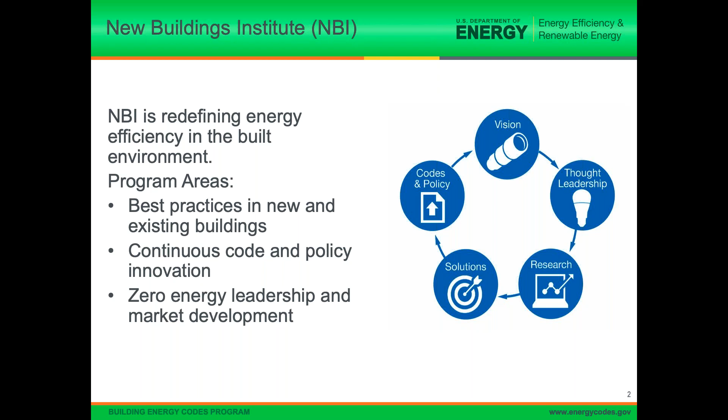NBI is a nonprofit working to improve the energy efficiency of buildings. We have a couple of areas that we focus in to pursue this end: best practices in new and existing buildings, so this would be guides that we put out into the market, continuous code and policy innovation, and zero energy leadership and market development.

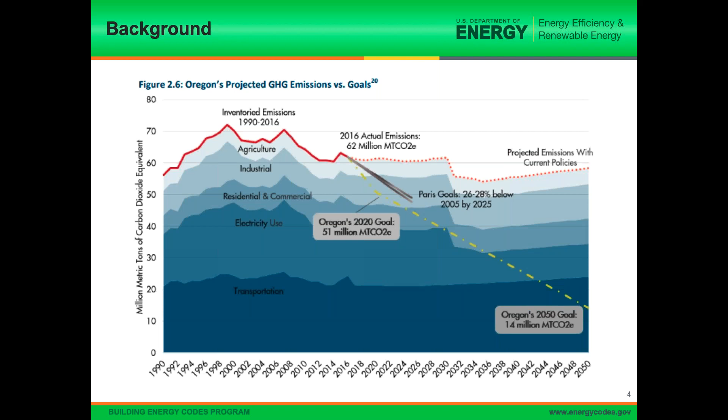I think it's useful to do a little bit of background information on why Oregon is making this change to its energy code. Through both legislation and executive orders, Oregon has some pretty aggressive goals for reducing greenhouse gas emissions and energy consumption in the state of Oregon. And of course, buildings are a big part of that. And so that means trying to bring down the energy and carbon consumption that we see in buildings, and the energy code is one of the prime policy tools to do that.

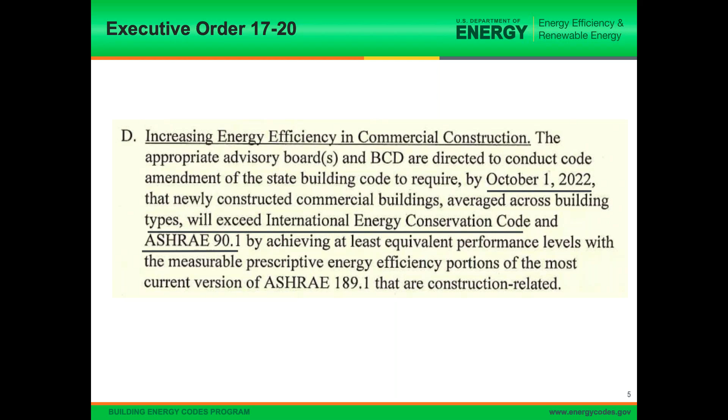Specifically, some of you may have heard of Executive Order 17-20, because it was a pretty big and sweeping statement on what the governor hopes to accomplish in the state of Oregon. And it specifically has direction for the commercial energy code to achieve the levels of efficiency that we see out of national standard codes by October 2022 or even better. And this is part of the reason that Oregon needed to make a shift from its previous code, which was a little bit of a combination of home-brewed requirements developed in Oregon itself and the IECC.

The state made the choice to go across to ASHRAE Standard 90.1 instead of the code that it had before for a series of reasons, including the national vetting process and then the many tools that are available for use and the savings analysis that has already been done, to streamline the code adoption process in Oregon so that we don't have the same kind of long delays in between energy code updates.

And in order to go beyond what the model code's done, Oregon has adopted a zero-ready code. And this is based on the Zero Code produced by Architecture 2030, which is a combination of using ASHRAE Standard 90.1 as a basis for performance and then pairing that with on-site and other renewable energy to bring the building performance to zero net energy.

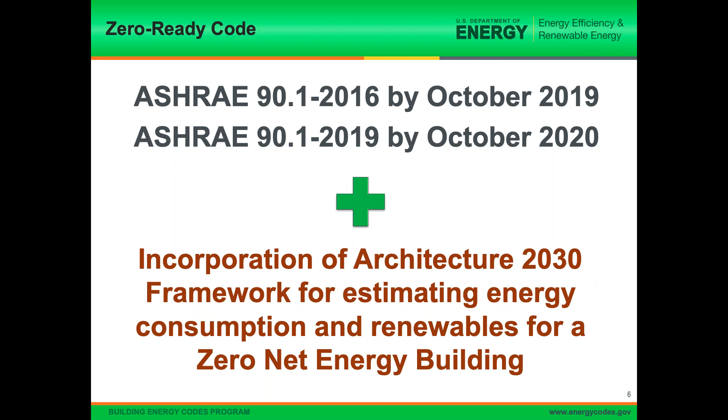Now, the reason that this is a zero ready code and not an actual zero energy code is that unlike the zero code that Architecture 2030 has put together, in Oregon, you won't have to install the renewable energy system. You will only need to calculate the size of renewable energy system that would be required to make your building zero net energy. So performance levels are determined by ASHRAE standard 90.1, and then you do this additional calculation that will let you know how much renewable energy you would have needed to make your building zero net energy.

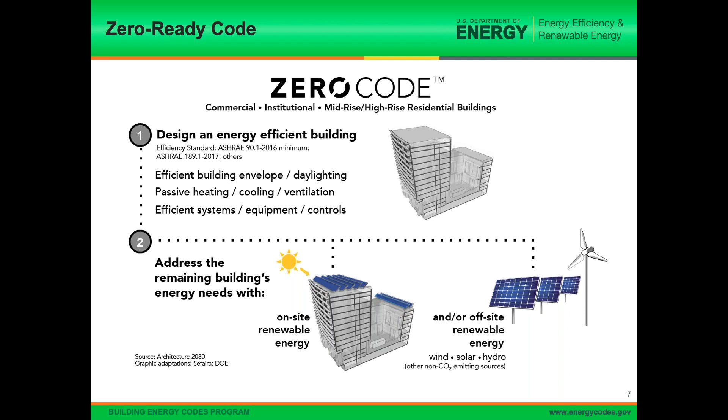This will be useful for designers who are going through the process to see really what is the gap between their building performance and the amount of renewable energy production that they could conceivably build on site, and begin to adjust their design practices to get closer and closer to zero net energy. Now, to assist in this, Architecture 2030 has actually put out some tools for calculating the size of the renewable energy system that you might need.

You can enter in some simple information about your building, like its location, number of stories, how it's used, and then some information about typical renewable energy system that you might install on your building. And with this really pretty simple information, in most cases for the renewable energy system you'd be using best practices and what's available on the market. You can calculate the size of the on-site system that you would need to achieve zero energy in your building.

It was also recently announced that Oregon has adopted as a statewide alternative method the 2018 edition of the International Energy Conservation Code. So this is to help make this transition into the new codes. It gives greater flexibility. You can still use a code that's based on the I codes, and IECC 2018, while not quite as stringent as ASHRAE 90.1 2016 on average, in some cases is actually more stringent. In some cases, it's less. This will provide an option for you to go through for compliance.

The structure of 90.1 is, while it's divided into chapters and the numbering is very different than what we've had in Oregon in the past, the order of things and the way things are grouped is still fairly similar. You see that we go through purpose, scope, and definitions in the first 3 chapters. Chapter 4 has administration and enforcement. You might be used to seeing that a little bit earlier. Then we go into building envelope. Then we have a chapter for heating, ventilating, and air conditioning, chapter for service water heating, a dedicated chapter for power. It's short, but it is a standalone chapter. A chapter for lighting, a chapter for other equipment.

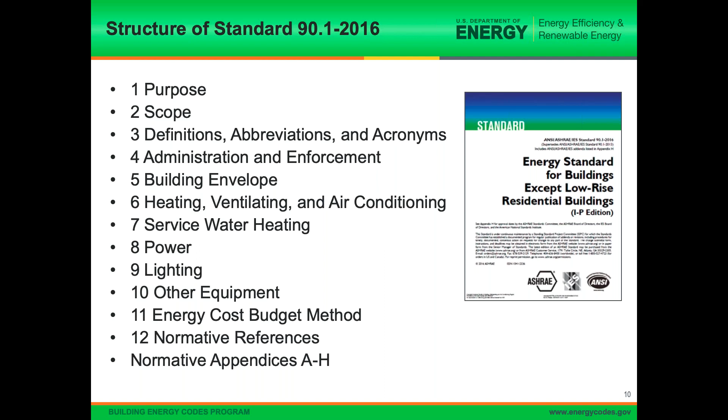And then we have chapter 11, which is using modeled simulation, it's computer modeling for compliance. We have chapter 12, which is the normative references, and then a series of appendices. And you might be very familiar with Appendix A. It's the one that gives you the U factor values for various wall and envelope assemblies so that you can look up your assembly, see what the resulting U factor of that assembly is. Whether or not you're using ASHRAE, a lot of people will use this when they're designing their envelopes. And then Appendix G, which is another modeling methodology that's available within 90.1, a rating model methodology that allows you to see how much you might actually be exceeding the code.

The way that 90.1 applies is really how we've seen before. There's not a lot of changes here. It applies to new buildings. It applies to additions pretty much as if they were new buildings, with some exceptions when you're extending systems from the main building into the addition. Alterations, it applies to the scope of the alteration with certain exceptions for certain activities. It applies to new equipment that's going into a building, and then it has criteria for determining compliance with requirements.

Unlike the IECC, it does not apply to single-family homes or low-rise multifamily. There is not another section of 90.1 that applies to these types. ASHRAE does have a standard, 90.2, that applies to low-rise residential, including single-family, but that has not been adopted in Oregon at this time. And then 90.1 doesn't apply to buildings that don't use any electricity or fossil fuels. So if you're not importing energy to the site in these forms, then it makes sense that you wouldn't apply an energy code to it.

There are, as always, certain buildings and elements that may be exempt from the code, either fully or partially. So make sure that you're checking as you are taking on a project, especially if you are less familiar with 90.1. And the caveat of all energy codes is that it's never going to circumvent any safety, health, or environmental requirements that are elsewhere in the code.

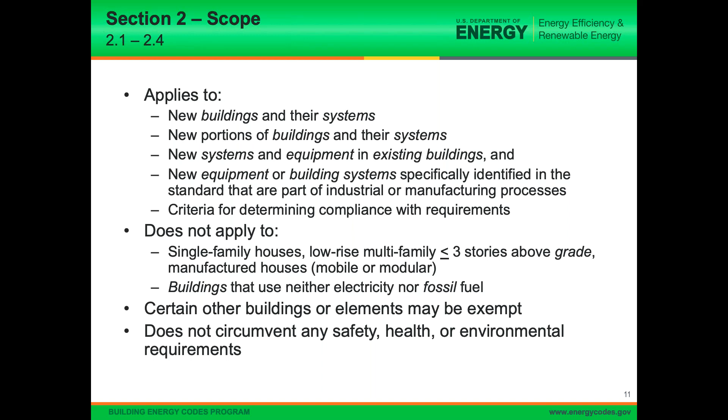When you're using 90.1, there are really three compliance paths through it. The prescriptive path, which is the list of requirements, do all these things and you comply. There's the energy cost budget that we mentioned in chapter 11, and then Appendix G. And a thing to point out about Appendix G for anyone who's familiar with ASHRAE is that in the past, Appendix G wasn't technically a code compliance path.

A lot of jurisdictions allowed it to be used that way anyway, but the way it was structured, it was really meant to be a rating system. But in 2016, it has been modified so that it is specifically allowed within the standard to be used for code compliance with 90.1. And that's not the only change to Appendix G that we want to make you aware of. We're really talking about power and lighting today, but want to make sure that you understand that Appendix G went through a couple of fairly large changes in 2016.

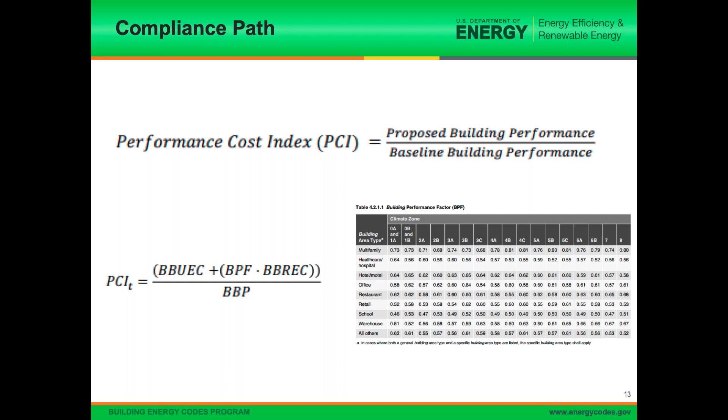So when we look at the lighting section, in many of the chapters, what we'll have is a prescriptive option, and there is some option for doing trade-offs, and maybe there's a simplified option. It's especially the case in HVAC. But in lighting, we really only have the prescriptive option, and then you can do one of the two modeling approaches. And so that's what we'll cover today in lighting. For power, however, which is where we're going to start, we're looking at all mandatory. So in some ways, there's not a prescriptive path through because everything is required. And these are things that can't be traded off even if you do modeling.

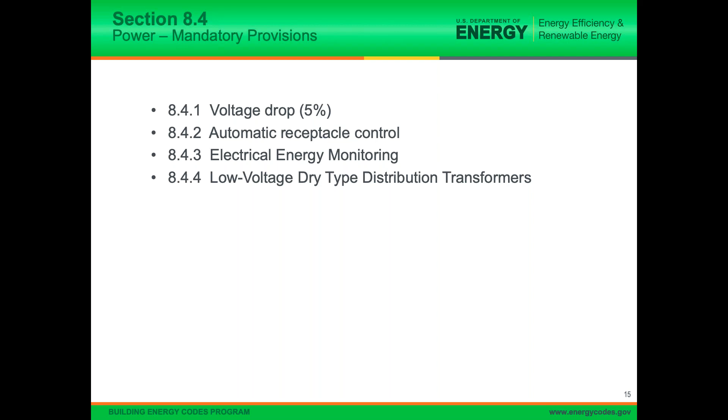We have 4 basic mandatory requirements here: one for voltage drop, automatic receptacle control, electrical energy monitoring, and low voltage dry type distribution transformer requirements. Want to point out especially automatic receptacle control and electrical energy monitoring. These are 2 requirements that really set 90.1 apart from a lot of other energy codes and from the previous energy code that was in place in Oregon. So these are something that you'll really need to pay attention to. We're not going to really talk about voltage drop because it really just limits voltage drop to 5%, and it's a pretty simple requirement. And we're going to jump right into automatically controlled receptacles.

What this requirement has is that at least 50% of all of your standard 125 volt, 15 and 20 amp receptacles have to be controlled in specific use type spaces: private offices, conference rooms, rooms used primarily for printing or copying functions, break rooms, classrooms, and individual workstations. Now, when you look at this, these are really heavily dominated by office space types. The requirement is that 50% of the receptacles need to be switched. There's one way to achieve this that requires more materials, and then there's a simpler way.

One way is that you can just use a whole receptacle, the duplex, both plugs in the receptacle, and put a switched receptacle next to an unswitched receptacle and get to your 50% that way. However, that's a lot more wire, a lot more receptacles, a lot more wall penetrations. You can also do an approach, the option on the right in the diagram, where you can run separate power lines to the same receptacle and have them powered separately. This is something that we see a lot in residential construction. The way that it's usually done in residential is that the bottom is always on and the top is switched. The code doesn't require which one is always on and which is switched, but that's the convention that a lot of people will find familiar.

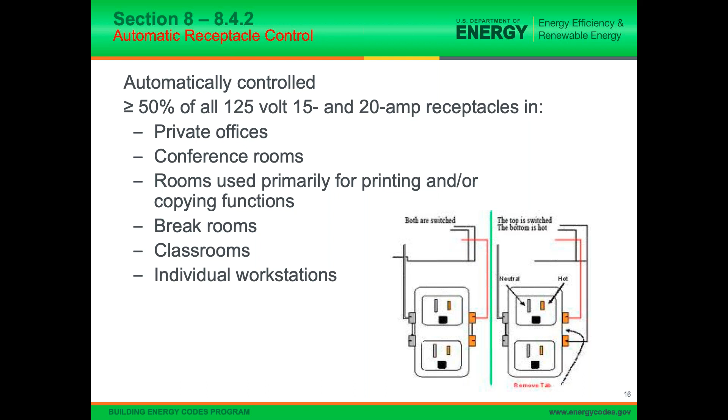And then you can switch only half the receptacle and easily achieve your 50% without having to do a whole lot of extra receptacles. You just need to switch to a different type of wiring that's got an extra wire either in the conduit or in the Romex. And it's a more cost-effective way to meet this requirement. This is one of the big differences. This is not something that you can trade off by modeling, so it's something to keep in mind as you're moving forward. Now, that switched receptacle has requirements for what the switching functionality actually looks like.

So you can have automatic control devices, and you can either have a time of day controller, but if you have a time of day controller, which is really just a time clock, then it has to control less than 5,000 square feet of area, can't control more than a single floor in a multi-floor building, and if the occupant is able to manually override the control, it can only be an override for up to 2 hours.

If you don't want to do a time of day controller, then you can do occupancy sensors to turn off the receptacles within 20 minutes of the occupant leaving, or you can do a more sophisticated system that uses an automated signal from some other control. So if you have occupancy controls on, say, the lighting or the ventilation, or if you have a security system, some other control mechanism that turns it off on the schedule of the building. And again, not more than 20 minutes after determining that the area is unoccupied.

So you have a lot of flexibility for the control of those controlled receptacles, from very simple, when it comes down to it, the time of day controller is an inexpensive and a pretty straightforward control, to some far more sophisticated and effective control technologies.

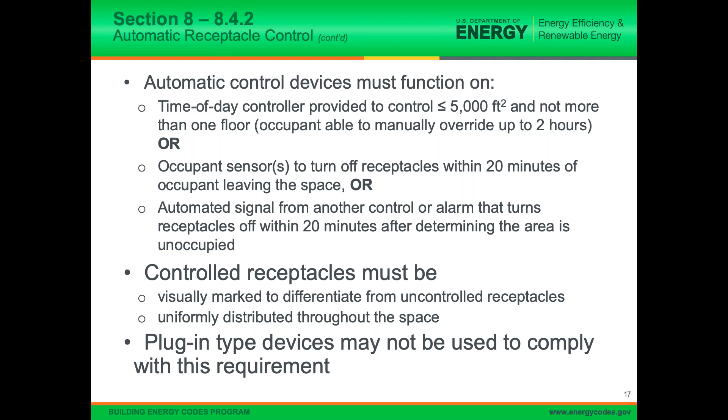And plug-in switching devices can't be used to comply with the requirement. So we have a lot of occupancy or time controlled power strips that can be a very effective way to save energy, but they can't be used for code compliance, mostly because they're not permanently installed, and those power strips tend to walk away, and the energy code is really about the building itself.

There are, of course, some exceptions to this. Any receptacles that are designed for equipment that's going to be on all the time anyway are going to be exempted from it, and any spaces where automatic control would cause security or safety concerns. Life safety is always going to trump energy saving requirements.

Our next mandatory measure in power is for energy monitoring. And in this case, 90.1 requires measurement devices to be installed to not just monitor the electrical energy use for the building, but for energy type sub-uses separately. And those are HVAC systems, interior lighting, exterior lighting, and receptacles. And those have to be monitored separately from total.

The total can either be the sum of the other monitors, or you could have a dedicated monitoring device, a dedicated meter for the total itself. Some utility meters do have an output port that allows you to connect them into a monitoring system. Some don't, so that might be an option for you.

If you have a building with multiple tenants, then you have to have this monitoring separate for each tenant space. So that can be a challenging part of meeting this requirement, especially in core and shell, but the separate spaces do need to be monitored separately.

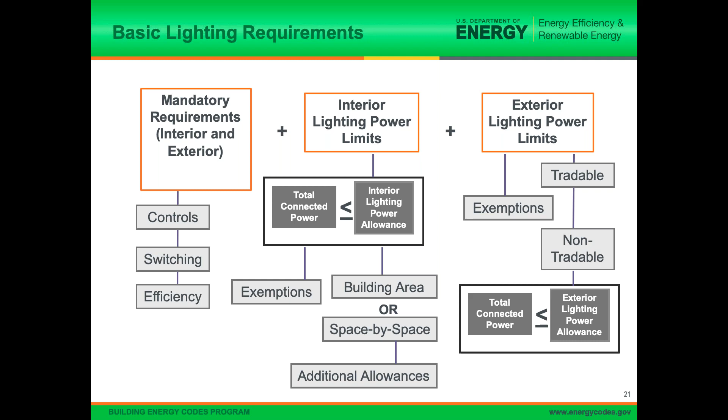And then you have requirements for exterior lighting power limits. And these are also very similar to what we had in the Oregon Code before, even if the numbers are different. So let's go ahead and start with the mandatory requirement. Well, we'll do a little overview of what this section looks like.

So we have the general application at the top, and the basis for compliance in 9.2. 9.4 is where we see all of the mandatory requirements. If you've been paying attention to these webinars, you might notice that ASHRAE is structured so that point 4 is always the mandatory requirements in every chapter, and point 5 is the prescriptive path in every chapter.

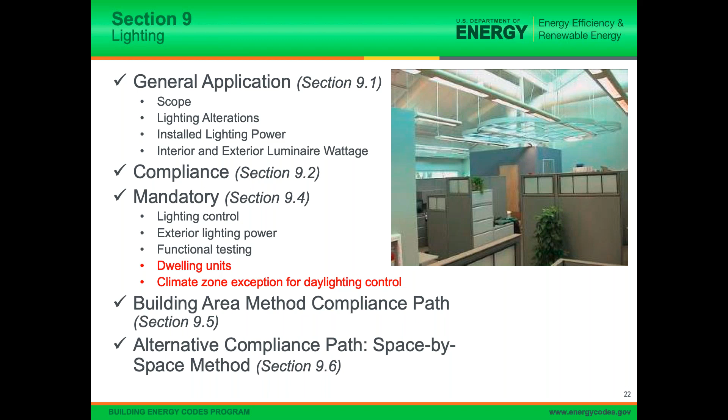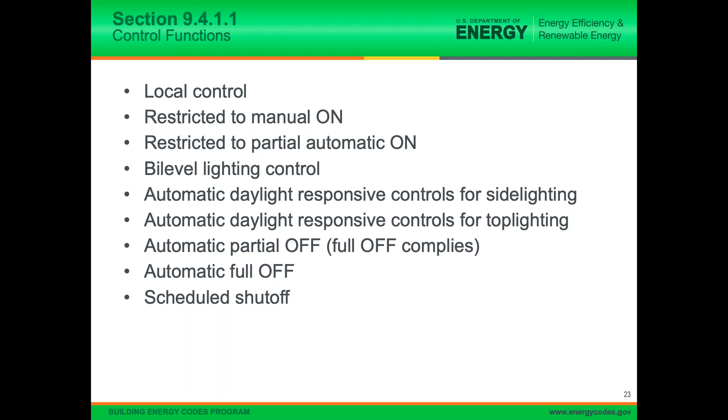And then we have the two options here, the building area compliance path or the alternate compliance path, which is the space-by-space method. So the control functions, we have a whole series that we'll go through here. And these are the control functionality that you have to have for your lighting. So uncontrolled lighting is really not something that's allowed under 90.1 in pretty much all circumstances.

So let's start with local control. So at least one control has to control all of the lighting in the spaces for spaces smaller than 10,000 square feet. Doesn't mean that you can't have more, but at least one. And for spaces under 10,000 square feet, each control has to serve no more than 2,500 square feet. And for spaces bigger than 10,000 square feet, no control can control more than 10,000 square feet. So you see this certain amount of granularity that is required for local control so that users in the space can actually turn the lights on and off.

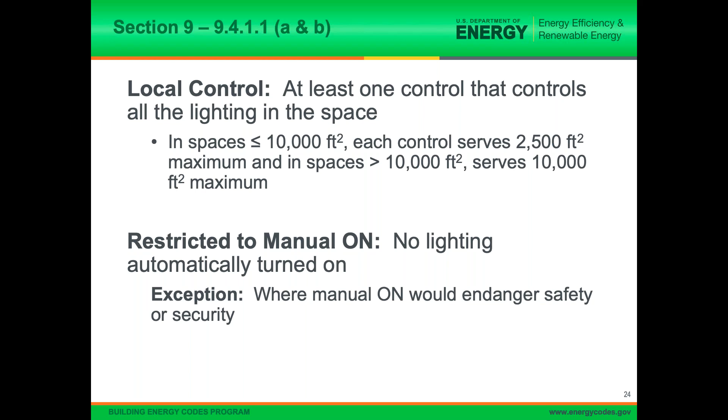So in most cases, all lighting has to be manual on and is not allowed to be automatic on, except for situations where manual on would endanger safety or security. A lot of times bathrooms would account for this, certain circulation spaces. And this is really the difference between vacancy controls, which are manual on, and occupancy controls, which are both auto on and auto off.

There are some spaces that are restricted to partial on. So less than 50% of the general lighting power is allowed to be automatically turned on, and none of the remaining lighting automatically turned on. And we have some exceptions for this as well. Mostly open office plans, you have a certain amount of flexibility under this.

We also have requirements for bi-level controls. And this means that general lighting in a space has to provide at least one intermediate step in lighting power between on and off, or continuous dimming between on and off.

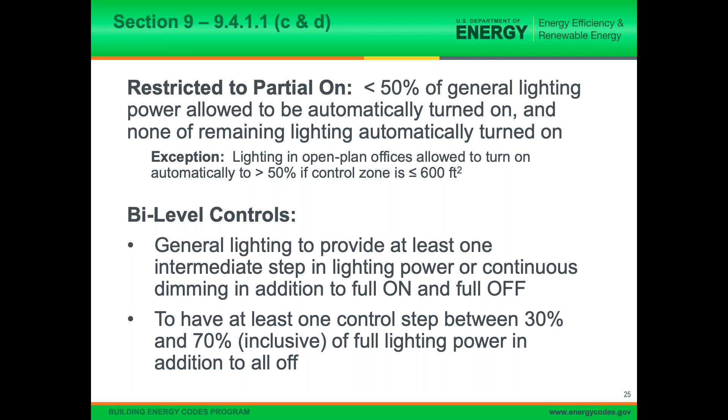We also have requirements for automatic daylighting controls. And these are triggered when you have a side lit area that has more than 150 watts of lighting, which these days is really not a lot of lighting, or when you have a primary and secondary side lit area together with more than 300 watts. If you're familiar with the I-codes, this is one of the differences that we have in ASHRAE versus the I-codes. It defines both a primary and a secondary daylighting zone.

If you think about how daylight penetrates a space, it gets dimmer and dimmer as you get deeper into the space. So you have part of the space that really can't be controlled by that area closer to the window that will have enough daylight a lot of the time. And so we have separate control requirements for primary and secondary, and they have to be controlled separately from each other so that when it's bright enough in the primary zone, but not bright enough in the secondary zone, you can reduce or turn off the lighting in the primary zone while the secondary zone is at a level of lighting that is appropriate for that deeper position within the space.

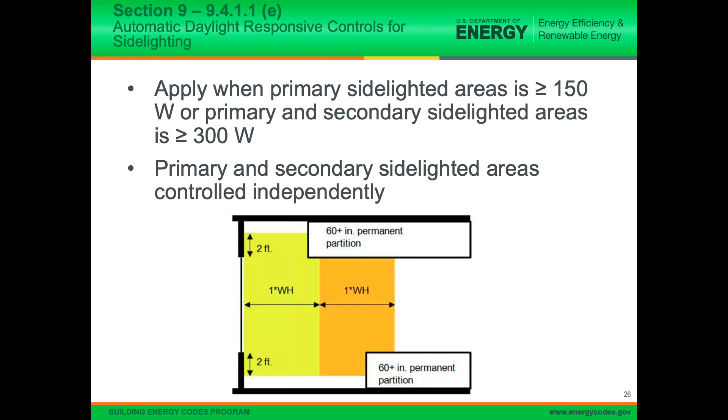So we also have control requirements for when you have top lighting, and it's very similar when you have more than 150 watts of lighting under a top lit area. That triggers the automatic controls as well. There's also a requirement here for the automatic daylighting controls that wherever you have an overlap between top lighting and side lighting, that area should be controlled with the top lighting control. And the idea here is that you're generally going to get longer usable daylight through your top lighting than you are from your side lighting.

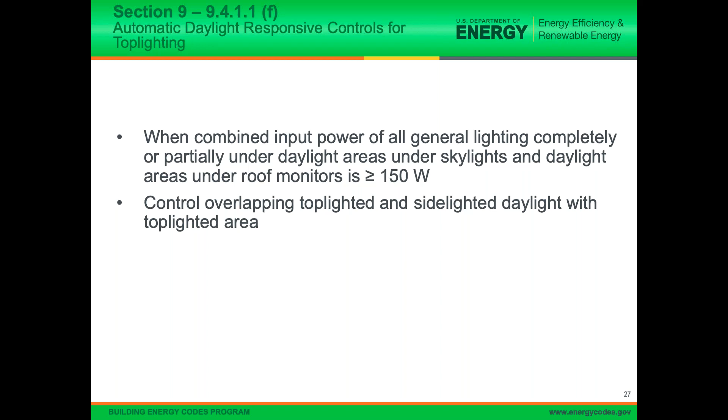Then we have a series of requirements for the control systems. And these are meant to address some of the issues that have historically plagued automatic daylighting systems. Technology has gotten a lot better, and these requirements help make sure that you're getting better technology into the building. So the calibration adjustment position for the daylighting sensor is located less than 11 feet above the finished floor in a side lit area, and the calibration doesn't require the physical presence of a person at the sensor. This can be a big thing. In some systems, you had to have two people to do your calibration. So this allows calibration to be done by a single person.

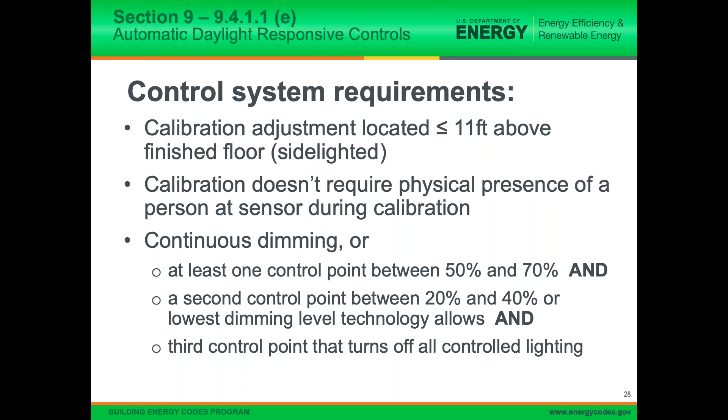And then there's a requirement for either continuous dimming, which is very easy with fluorescent and LED lighting, or stepped dimming that has at least one control point between 50 and 70%, and then a second control point between 20 and 40%, or the lowest dimming level that technology allows. Some lighting technologies have a lower limit to the lighting power that is possible while still putting out light. And then a third control point that turns off all the lighting together. So either continuous dimming, or you can think of the 3 control points in step dimming.

And then we also have requirements to automatically reduce the general lighting power by at least 50% within 20 minutes of all occupants leaving the space, so occupancy controls. This only applies to certain space types, so make sure that you check to see that it's applying. But as always, we have some exceptions.

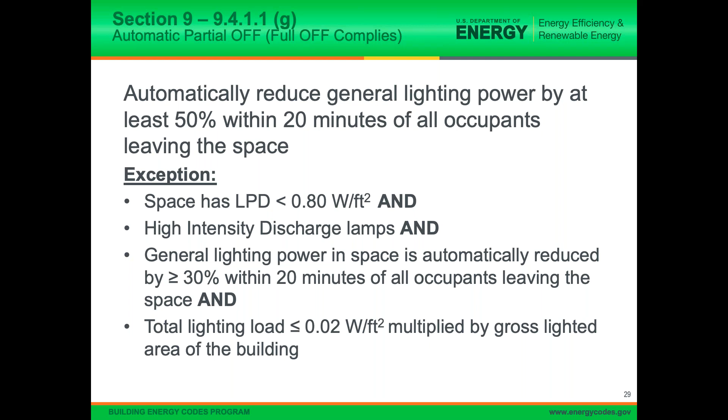So if the space has an LPD below 0.8 watts per square foot and it's an HID lamp, they really don't like to be turned off, which is why they are part of this. And you are reducing by more than 30%, which HID lights can do. And you have an overall lighting load that's less than 0.02 watts per square foot multiplied by the gross lighted area of the building. So it's kind of a total building criteria on that.

So you have a separate requirement for automatic full off for occupancy controls. And that's that all lighting automatically shuts off within 20 minutes of occupants leaving the space, and that the control device has to control an area less than 5,000 square feet. So these are the occupancy controls that will take you down to 0% lighting.

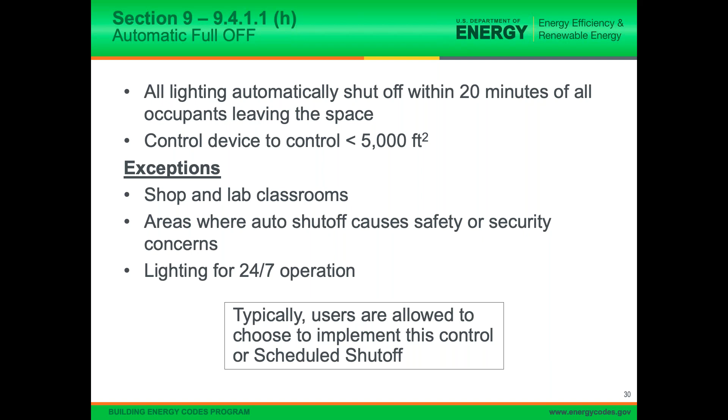And the exceptions for this are shop and lab classrooms. Any area where auto shut off could cause a safety or security concern, this is going to be especially entrances, and it'll be some corridors, any place where you might have equipment that could be dangerous if the lighting goes off. Then of course, any lighting that is intended for 24/7 operation.

We also have control requirements for a scheduled shut-off, and that's that lights have to be able to be controlled on a scheduled basis. So this is automatic time switch. This can either be a time of day controller or a signal from another controller alarm. This should sound very familiar because it's very similar to the receptacle requirements.

And the controller system needs to provide independent control sequences where the controls are for spaces less than 25,000 square feet. They can't be more than one floor. And this controller needs to be able to account for weekends and holidays. So this can't be a simple, same schedule every day type of controller. It's often called an astronomical time clock controller that can account for a more sophisticated schedule.

In this case too, we have requirements for the manual override. It can't override for more than 2 hours during scheduled off, and the control for the manual override has to be less than 5,000 square feet. These manual override controls largely come into play when you have the person, say, coming into an office after hours to work, but you also have cleaning staff. So there's typically not a need to have the lights come on for a longer term than that.

And then of course, with the scheduled shut off, we have exceptions as well. So any lighting that's meant for 24/7 operation, patient care spaces, and then the same issues around overall lighting load and any kind of safety and security concerns.

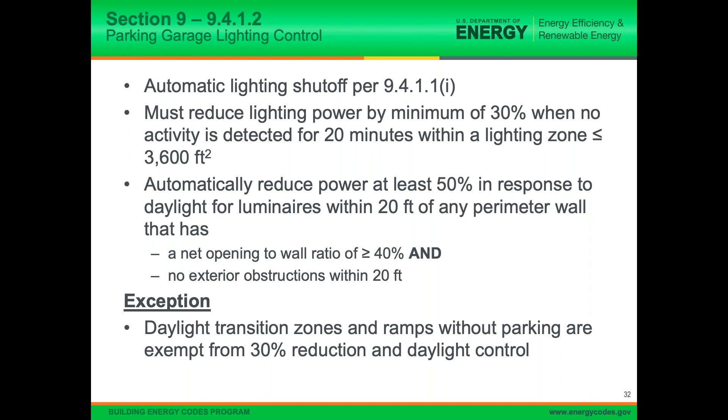We also have special control requirements for guest rooms, and this one is a big change, I think, for a lot of people in emerging technology, where similar to what we saw in HVAC, it's pretty much the same control methodology where guest room lighting and switched receptacles have to be turned off within 20 minutes of occupants leaving the space. So you would need to have control equipment in the space capable of switching these loads.

There is an exception for captive key card systems. So this is a system that uses the key card to know whether or not there's someone in the space. The bathrooms need to be controlled to automatically turn off lighting within 30 minutes of occupants leaving the space. This exempts low-level night lighting.

And then the supplemental task lighting, so the lamps that you always have by beds and on desks, need to be controlled by either a controller on the lamp itself or the luminaire itself, or a wall-mounted controller right there by the lamp. So none of this, you come in, you flip a switch, and it turns on all the lamps in the hotel or motel room.

For those of you who are on the HVAC webinar, this is very similar, and it's this exact same control methodology that we saw, and a lot of systems are actually capable of controlling all of these things together. The code requirements were really crafted around the technology functionality that's available on the market.

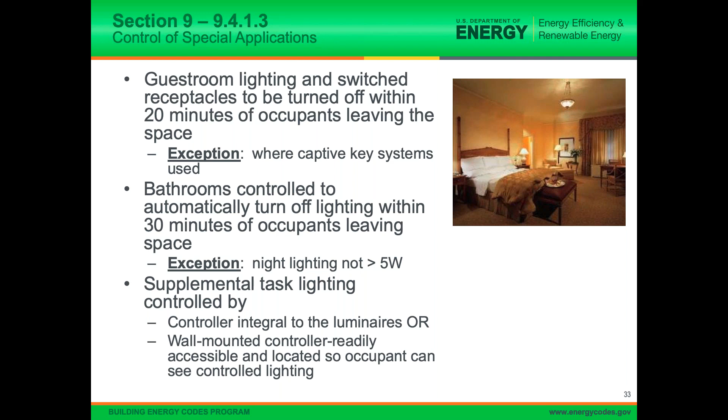And then we're going to jump to the exterior. Lighting has to have dawn till dusk controls, so turning off when there is sufficient daylight. Any building facade and landscape lighting, so anything that illuminates the facade, any of the landscape lighting, must be shut off, and it's really meant to turn it off during off hours. The way that the requirements are phrased is that it's either midnight or business closing, whichever is later. So if your business is open after midnight, then you can keep the lighting on after that.

And then it has to turn on no earlier than 6 a.m. or building opening, whichever is earlier. So if your business opens before 6 a.m., or a time that's established by the authority having jurisdiction, the AHJ. So you may see some set early times in some jurisdictions about when you can have that lighting come on.

And then there's requirements for the power for signage lighting. It has to be reduced by at least 50% from midnight or within 1 hour of end of business operations, whichever is later, and until 6 a.m. or business opening, whichever is earlier. So that should sound familiar from just a couple minutes ago.

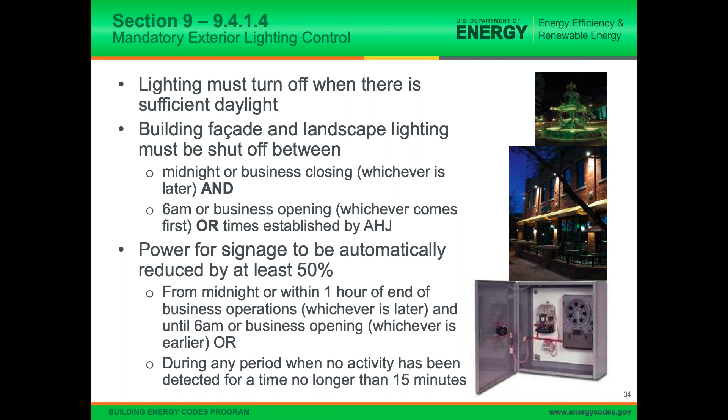And that during any period when no activity has been detected for a time no longer than 15 minutes. So if there's no activity around the signage. So this doesn't require that the signage be turned off, but just that the light levels get reduced really when you're during that inactive time.

We also have requirements for parking areas. So luminaires serving outdoor parking areas over a certain size, 78 watts, and a mounting height less than 24 feet have to be automatically controlled to reduce power by 50% when no activity is detected. And no more than 1,500 watts of lighting can be controlled together.

So 78 watts is, at this point, we really are talking about parking pole lamps for parking lot lighting. Some LEDs will actually come in below that, and so wouldn't be subject to these requirements. It's all going to depend on the luminaire configuration.

There are exceptions: covered vehicle entrances. Again, the idea is you want entrances to be fully lit. Exits from buildings and parking structures, the same condition, and any lighting integral to signage and installed by the manufacturer. So if you have any lighting that's part of a sign, you don't have to worry about retrofitting it to be controlled.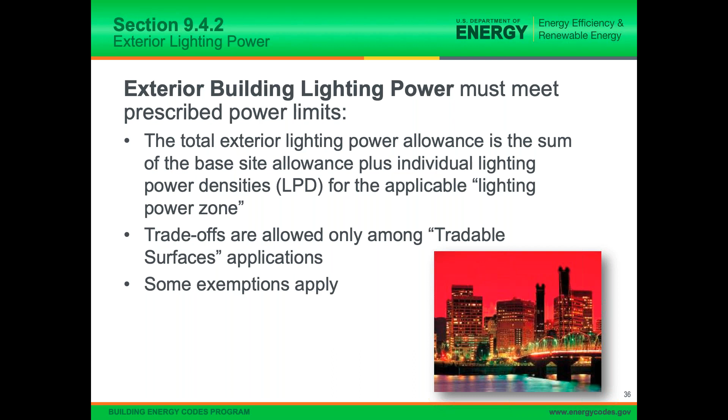And then we have power limits for the exterior lighting power. And this is based on a certain set of tables that you can see here. And this should actually look fairly familiar. It's the same basic methodology that we've had in place in Oregon before. However, some of the categories might be a little bit different and some of the numbers as we've gone to a more efficient standard. Of course, it's a combination of tradable and non-tradable spaces. These levels are generally quite easy to meet these days, and so often don't present a big challenge.

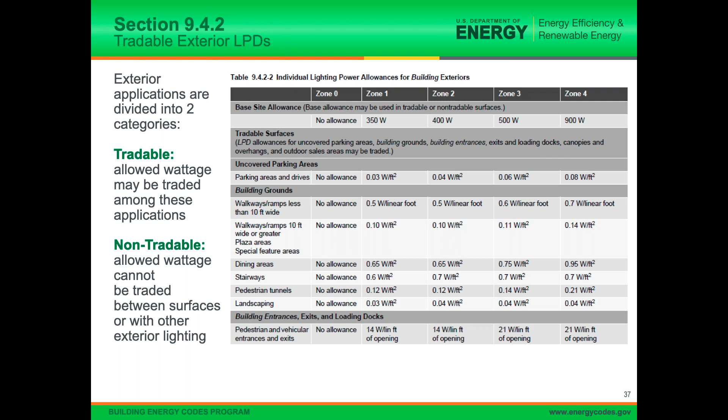And then finally, we have some requirements specifically for dwelling units, since 90.1 applies to high-rise residential, so any group R occupancy that is 4 stories or more. We have separate requirements for the dwelling units, and these really get to lighting efficacy rather than an LPD. And so at least 75% of the permanently installed lighting fixtures have to utilize lamps with an efficacy of at least 55 lumens per watt or have a total luminaire efficacy of 45 lumens per watt.

This is a change from what you've probably seen before, the definition for high efficacy lamps and then a series of lumen per watt requirements. As we have moved to CFLs and LED lighting, those watt categories really don't make a lot of sense anymore. And so 90.1 has coalesced around a single rating for lamps. And then you'll see this additional one for luminaire efficacy.

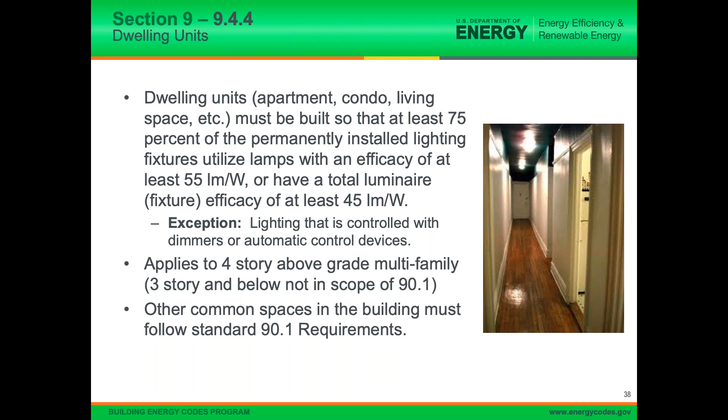And this one might be a little bit confusing because the integrated LED luminaires on the commercial market are generally very efficient, but the residential style integrated LED luminaires are often not. And so this separate requirement for luminaire efficacy in the residential side is meant to account for the fact that the integrated LED luminaires that are available on the market for residential just don't tend to be as efficient. Outside of the dwelling units, all of those spaces need to comply with the general 90.1 lighting requirements.

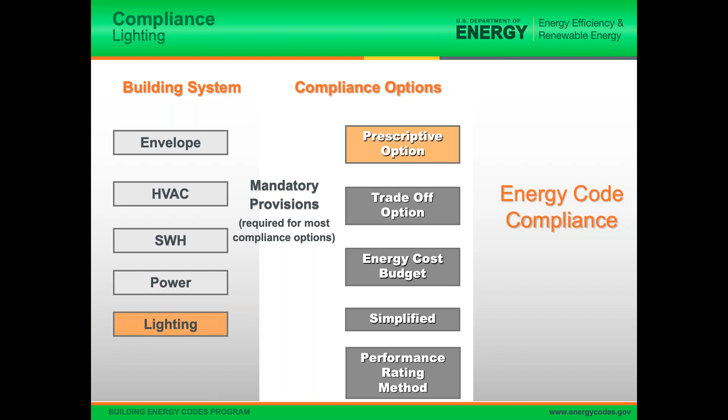So now let's talk about the actual LPD portion of the code. And this is one of the areas where 90.1 actually begins to look fairly different from other energy codes, IECC, or what Oregon had before. The basic prescriptive option does look familiar. It's just your building area method. You have a lighting power density that you are allowed for the entire building based on building type. You add up all your lighting power, you divide it by the total building area, and you make sure that it gets under that. So that part is very straightforward.

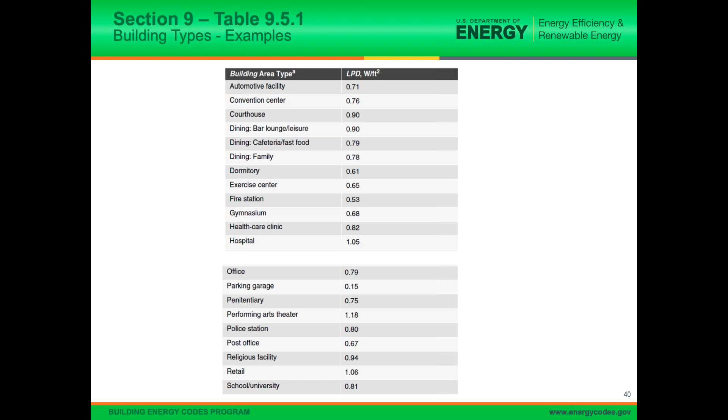We have more efficient requirements in these tables now. It should be noted though that generally you can meet these requirements without going to LEDs if you have good luminaire and lighting designs. If you have poor luminaire design or poor lighting designs, you might need to go ahead and move to LED to compensate for that fact, but we're not to the point yet where these are actually requiring LEDs. But in the space by space method that is maybe conceptually familiar, the approach in ASHRAE is very different than it is in IECC or what Oregon had before. And there's a lot to look at here, but let's think about it a little bit more globally, and then we'll dig into that chart itself.

So there are some advantages to using the space by space method. It's more flexible because you have these different space requirements. It more accurately accounts for the actual room lighting power needs. And it provides additional allowances for certain circumstances like difficult room configuration, retail needs, and any time where you might have advanced controls that the code's not already requiring. Really, the limitation is that you have more calculations that are needed and it's more complex.

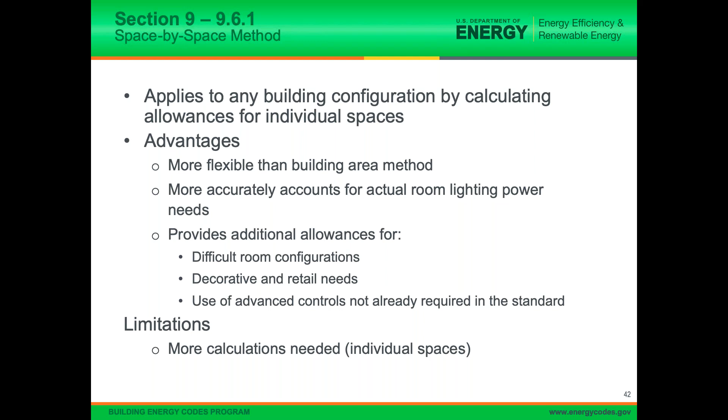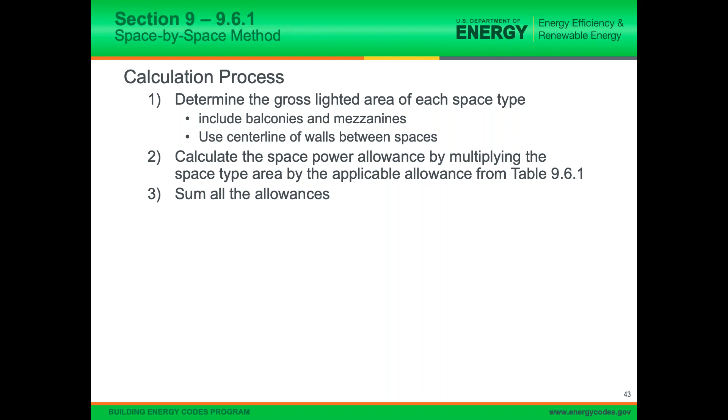The calculation process is similar to the whole building method, but there's some additional steps. So first, you're looking at a space by space approach rather than the whole building. And you go to your individual spaces and you have to determine the gross lighted area of each space type. You have to include balconies, you have to include mezzanines. You use the center line for walls between spaces, and then you calculate the space power allowance by multiplying the space type area by the applicable allowance from the table, and then you sum it all together. And that's where we're going to go ahead and look at this chart.

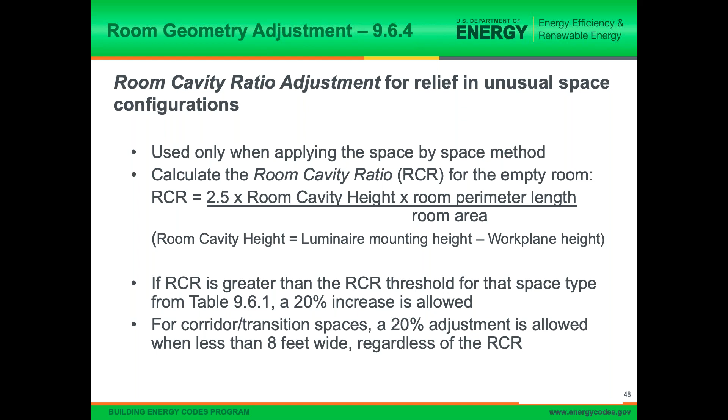For corridors and transition spaces, you can do that 20% when the space is less than 8 feet wide, regardless of the RCR. So in that case, they're considering that it's just going to be awkward to light. So this allows you additional lighting power to get the light from high mounted lighting down to the work plane in these awkwardly configured spaces for lighting.

We also have an adjustment available for decorative lighting, which is an allowance to increase the lighting power when you're using the space by space method, but there's some conditions under which you can use it. So first, your display lighting has to be controlled separately from the general lighting and automatically controlled.

And then the additional allowances can only be used for the additional lighting equipment and not for the general lighting. So that means just because you have this lighting allowance for display lighting doesn't mean that you can put in really efficient display lighting and then increase your general lighting.

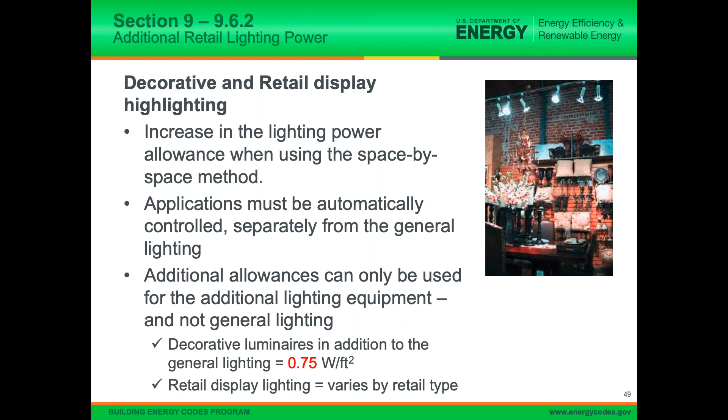And then there's an option to get an additional lighting allowance based on advanced controls. So an increase in the allowance is allowed when you have additional advanced controls. Unlike the retail lighting, this allowance can be used anywhere in the building. So you can save energy through advanced controls in one part of your building and then use it for extra lighting power in another part of your building.

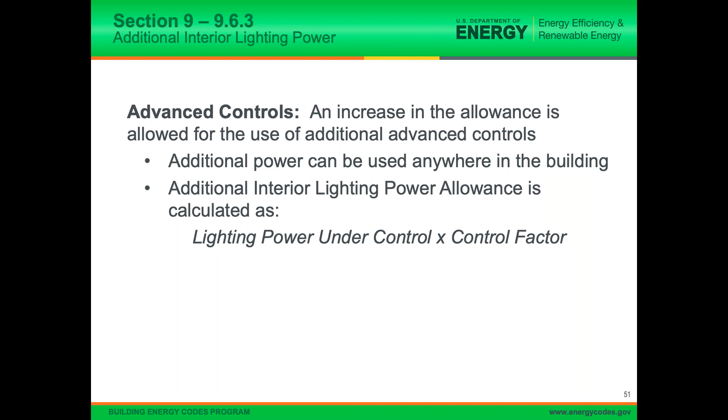So if you remember the chart that we looked at before where it had required lighting, and then in a lot of places there were blanks, because that type of lighting control was not required in that space type. Well, anywhere that you have one of those blanks, these control factors can be used to do an adjustment in your total LPD.

Now we rushed through that kind of fast because I wanted to make sure that we had some time for questions. There are a couple of places here where ASHRAE is really different. The practice is going to be really different for projects moving forward.